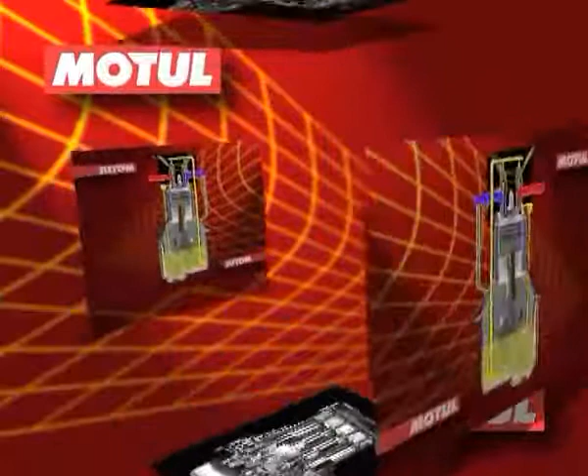Fuel, oil and lubricants, and their effects on combustion engines. Every time an engine is run, deposits are left behind, and these always have a long-term effect on the way the engine functions and its degree of efficiency.

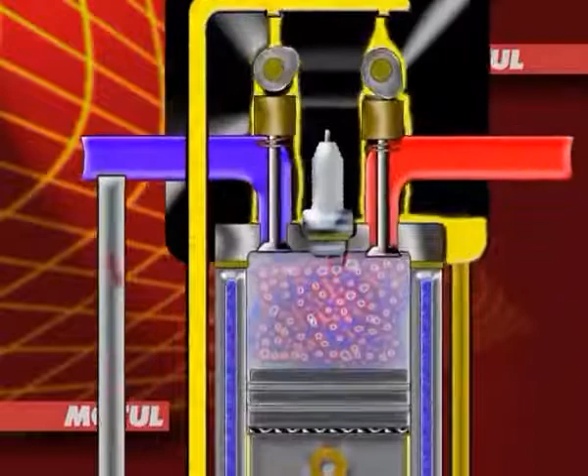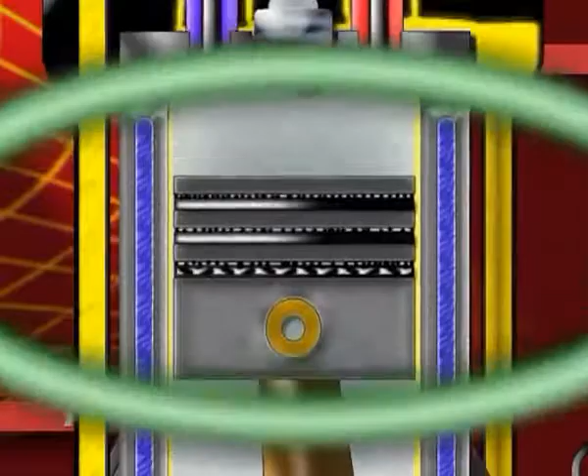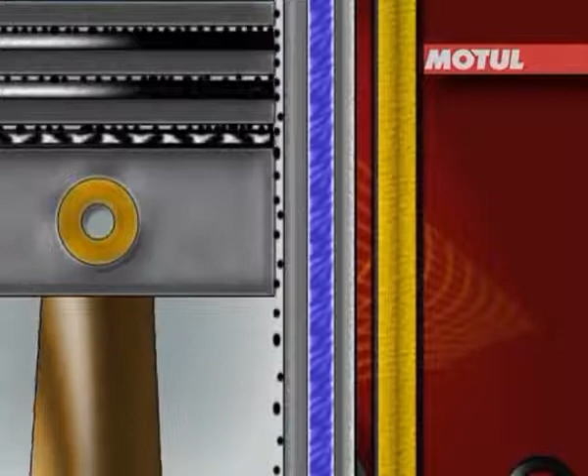In particular, compression is reduced as a result of sediment in the area of the piston rings, oil rings, and their grooves. The deterioration in the combustion of the fuel-air mixture resulting from this leads to a reduction in the engine's performance. As a result, there is an increase in both oil and fuel consumption. This creates a situation where the sediment caused by the combustion process increases markedly, exhaust fume levels rise, and not least, the wear and tear on engine parts escalates.

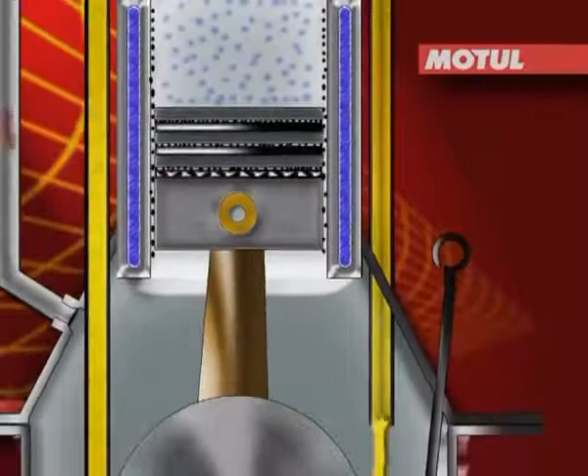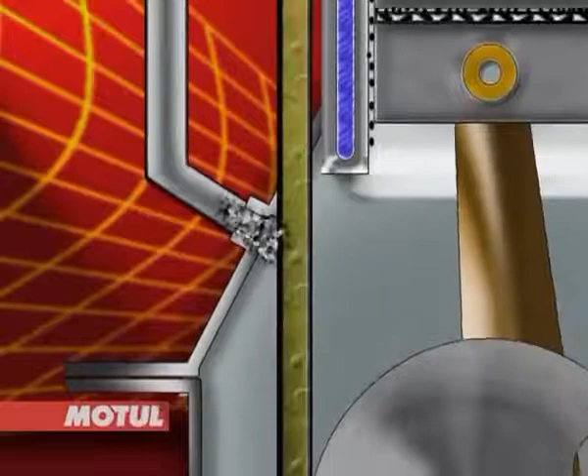Parts of the mixture and combustion gases evaporate in the crankcase and thereby accelerate the speed at which the quality of the oil deteriorates. This can lead to problems in the crankcase breather system. Larger particles of dirt, such as the formation of resin deposits in the oil ducts, can trigger a reduction in the lubrication of important components, for example, the camshaft.

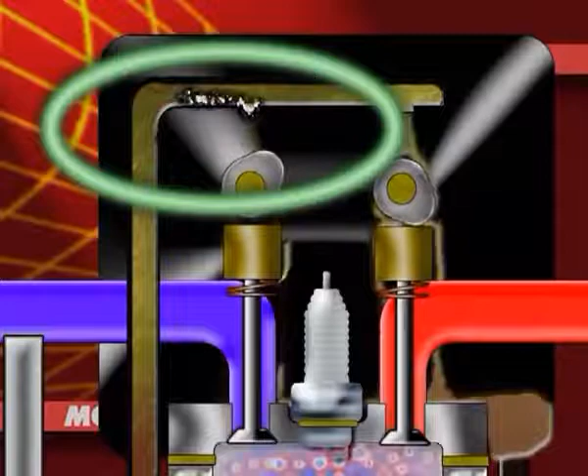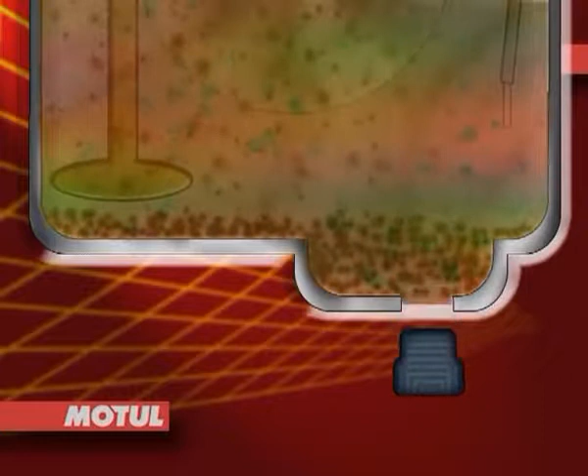Are all these impurities removed by a normal oil change? To illustrate this, let us have another look inside the crankcase. The old oil is drained during the simple oil change process. However, not all the impurities caused by running the engine are removed when the old oil is drained off. Some of them remain in the form of deposits in the oil and the lubrication system.

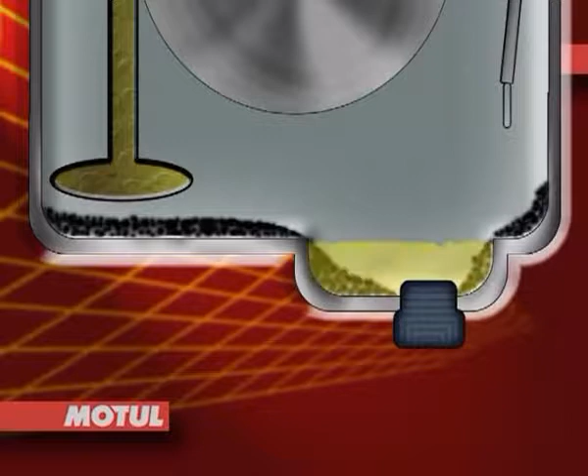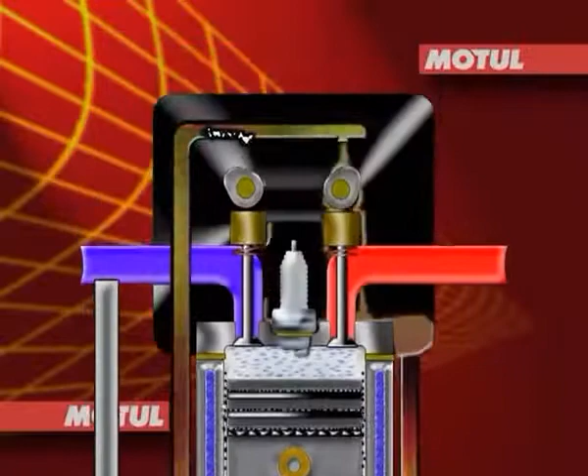Once the engine has been refilled with fresh, clean oil and is then started, the new oil absorbs the remaining deposits, and in a very short time, the oil is once again contaminated. This situation naturally has a negative effect on the efficiency of the new oil.

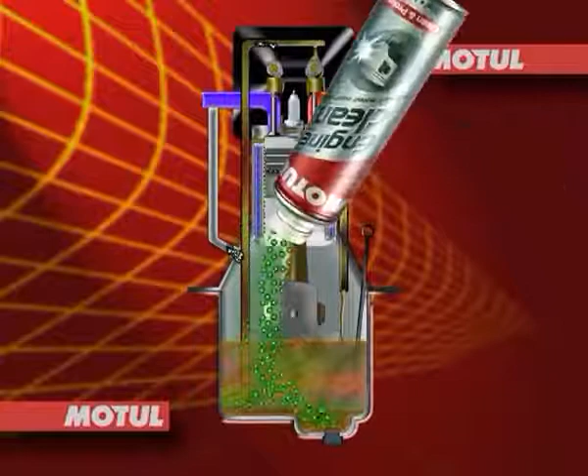In order to maintain both the performance and the economic efficiency of combustion engines, we recommend that the complete oil and lubrication system is cleaned before each oil change.

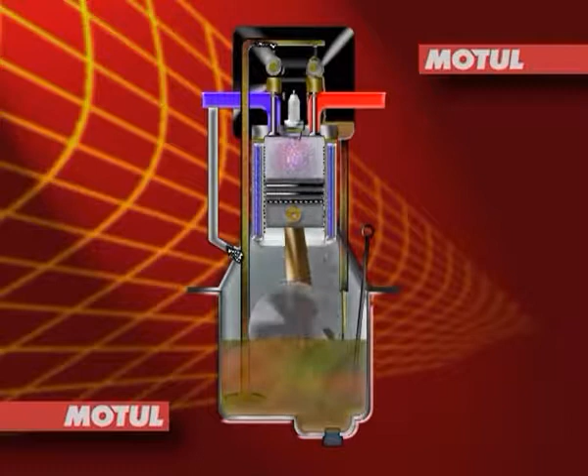After our cleaning agent has been added to the old oil, the engine is run in idling mode for 10 to 15 minutes. During this time, it releases all the impurities caused by running operations in very fine molecules, as shown here at individual problem zones.

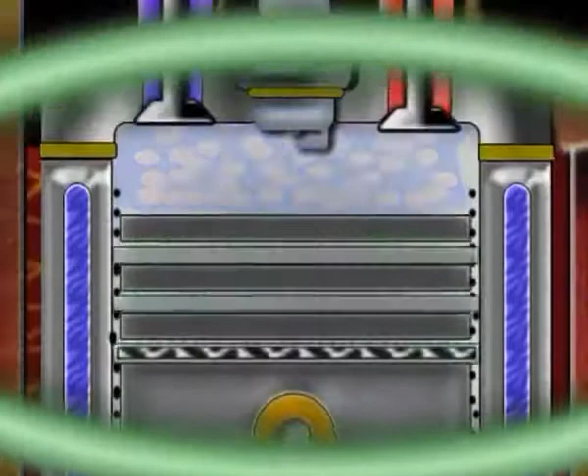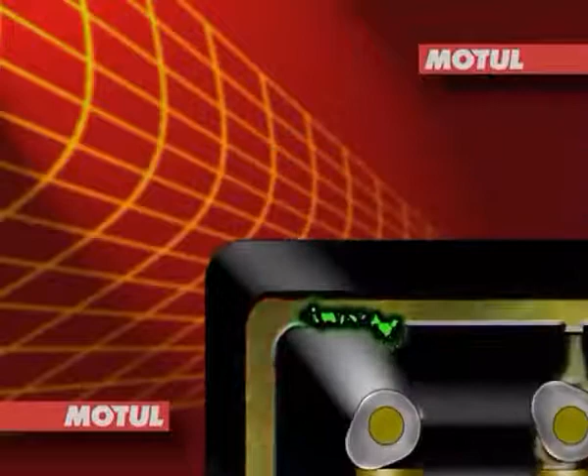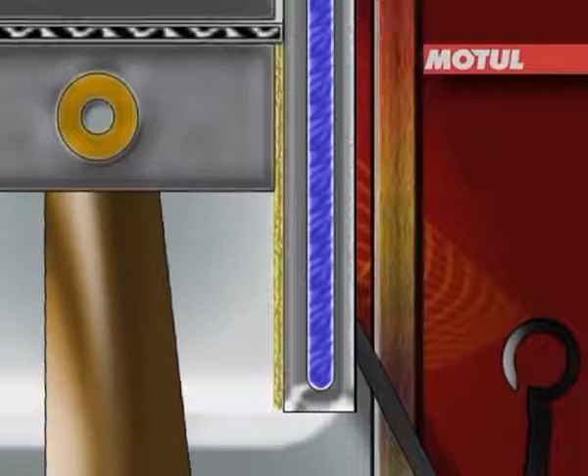In our example, this is the piston ring area, the crankcase breather area, the camshaft lubrication area. At the same time, highly efficient lubricating substances protect the engine during the whole cleaning process. Elastomers, such as oil seal rings and O-rings, are kept absolutely supple.

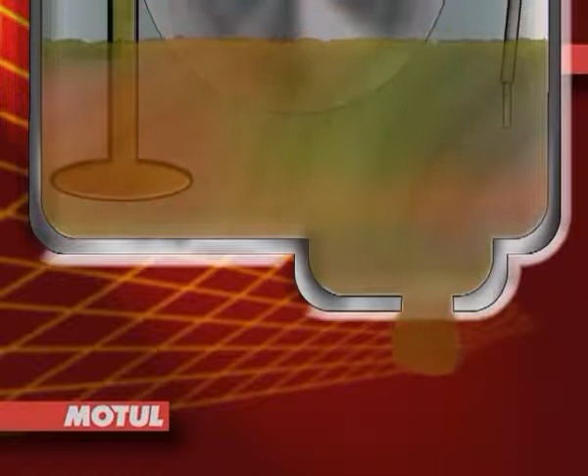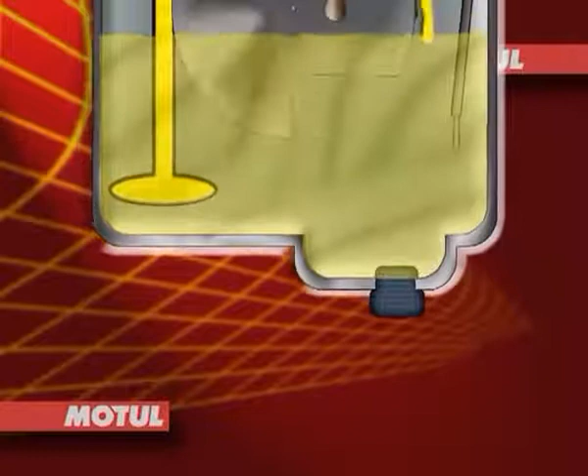All the impurities are now removed when the old oil is drained. This means that the oil and the lubrication system, which we fill with new fresh oil, are kept very clean. Now, the new oil can perform to the best of its ability in a clean environment and fulfill the tasks required of it, such as lubricating, sealing, cooling, purifying, and keeping particles in suspense.

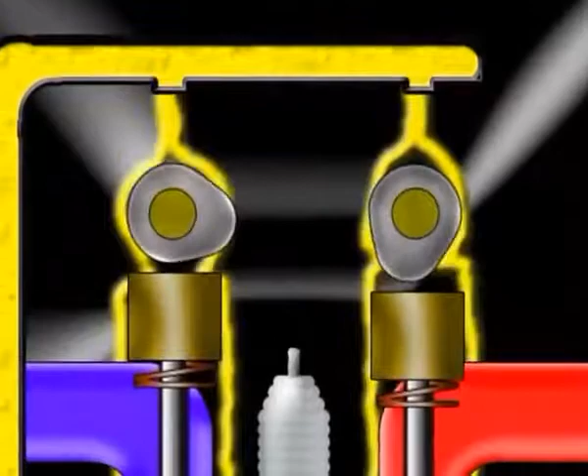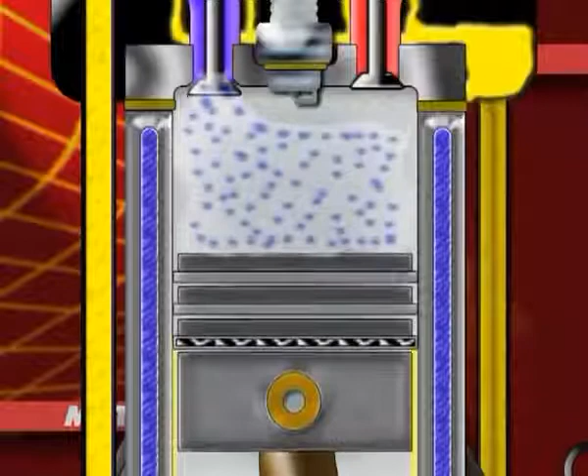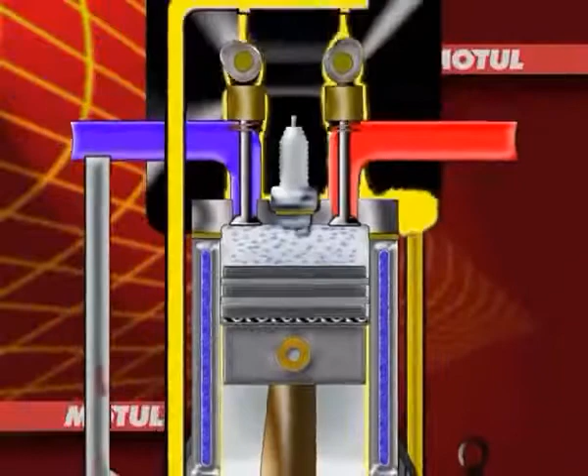The fresh oil is now able to absorb the impurities that have been newly created and is no longer limited in its ability to perform by the old deposits. As a result, we have new, fresh oil in a clean engine, the best possible oil and fuel consumption, improved engine performance, less wear and tear on parts, the lowest exhaust emissions, and a longer life for the catalytic converter.